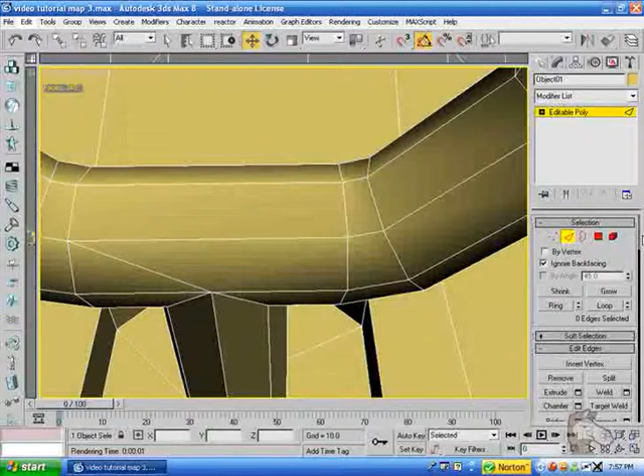Okay. Now I'm just gonna clean this up a little bit right here, so I'm gonna delete or target weld all these unused vertices to the side. Just to make things a little more professional, I'm going to create edges right there and right there. There you go.

Perfectly connected. The only thing left is to apply smoothing groups to that, which of course is really easy. Just gotta make sure you apply the right ones. That has a smoothing group of 1, so we don't want it to blend completely with this other thing it's connected to. So we want to give it a smoothing group of 2. There we go. Looks pretty good.

Except for the fact that this thing up here also had a smoothing group of 2. So we need to fix that real quick, because these are trying to smooth together. So just select everything up here and hit the clear all button. Now everything looks decent.

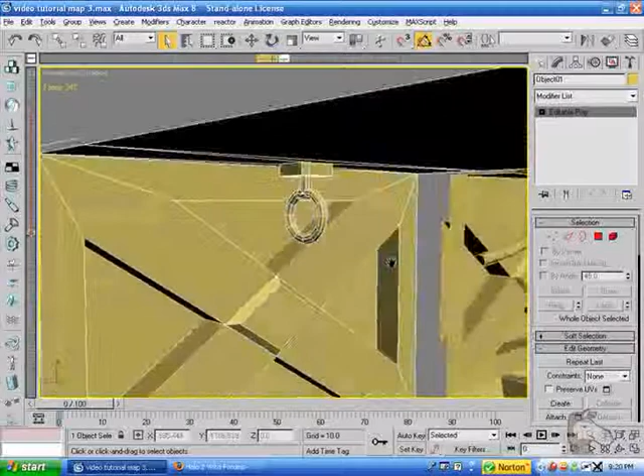Okay, now that that's done, I'm going to go ahead and create that hanging wire tube type thing that goes with loops. There's 2 loops over there, but that's just because there's 2 of these sections connected together. I'm just going to create it in a way where it can be connected end to end without any seams.

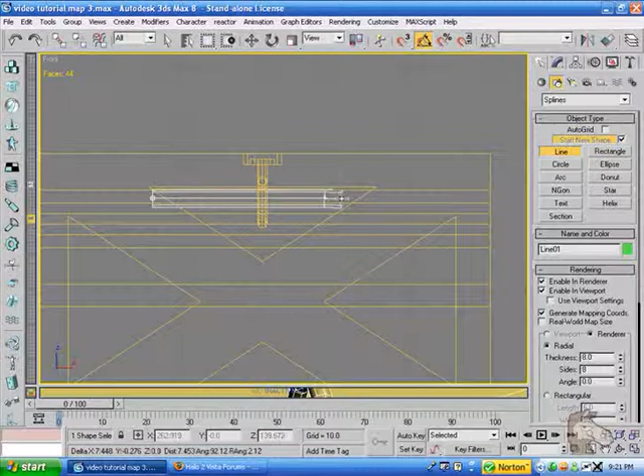Okay, so to create that, I'm going to go into the front viewport. I'm going to create a line to the center of this. Just like that. And to get that, hold on, it's way off in the distance. That's no problem. I'll just move it over here.

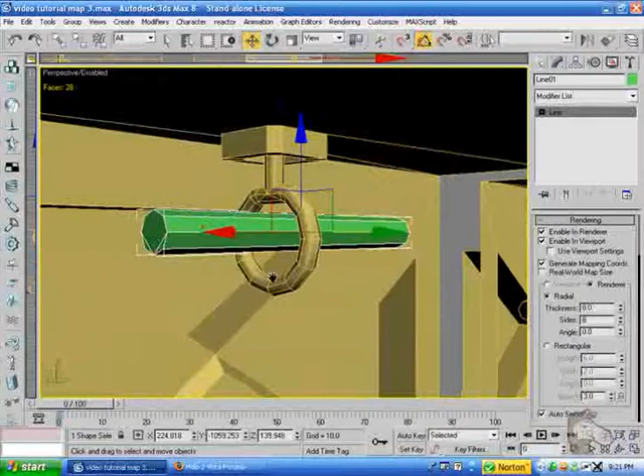Okay, to get it to create the cylinder like that, just enable the renderer and enable in viewport. Give it a thickness of 8 units and 8 sides. Again, you can use less sides if you want to conserve polygons, but I'm just going to use this many because I want everything to look decent.

Okay. So just go ahead and convert that to an editable poly. Delete the ends.

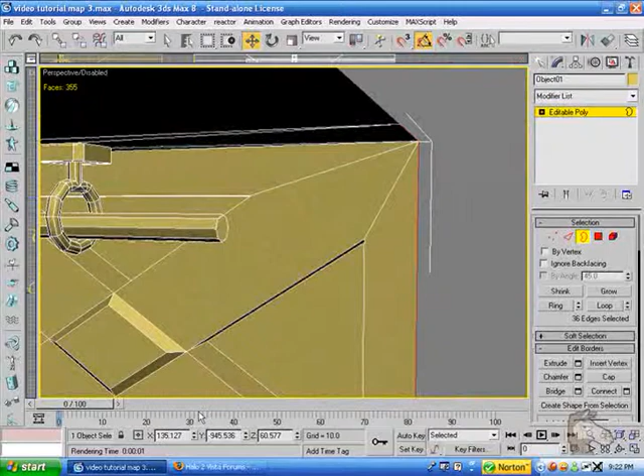Go ahead and select your normal object and attach it to this new cylinder. Find the coordinates of the end of the model and then transfer that to the border end of this, so everything lines up. Do the exact same thing for the other side. Okay, it looks pretty good.

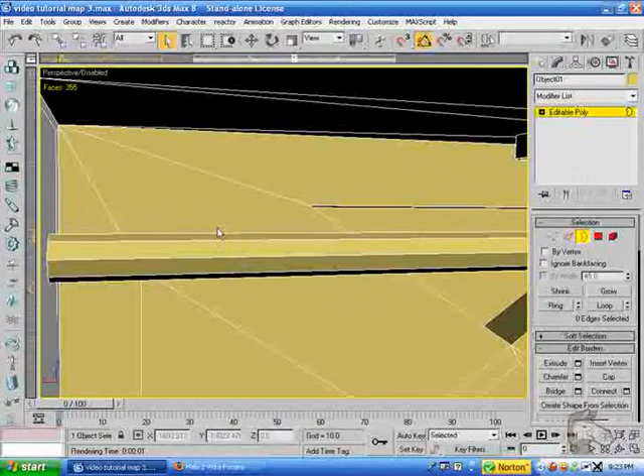Okay, now to do that bent thing, first of all I'm going to connect it in the center once by just selecting all the edges and then hitting connect. Okay, now that that's done, I'm going to move down these borders on the edge to make it more of a curved type of tube thing.

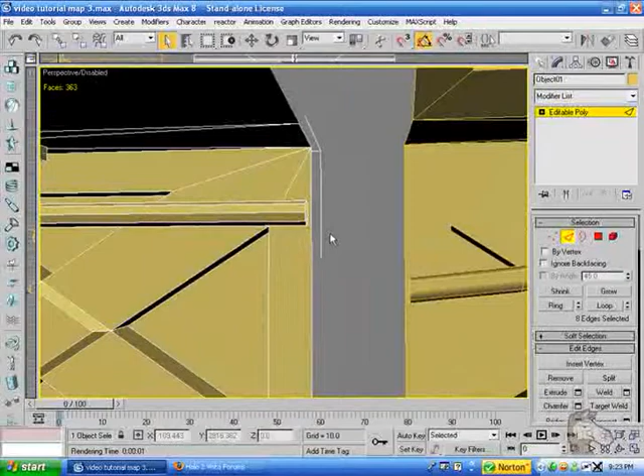So select your 2 borders and then just kind of drag them down like so. I'm just putting them at the same height as I did over here. Once again, these are all decisions you make as you go, but actually that doesn't seem to be the same height at all. I gotta check that real quick. Okay, just a little too high. I'm gonna move it down a bit.

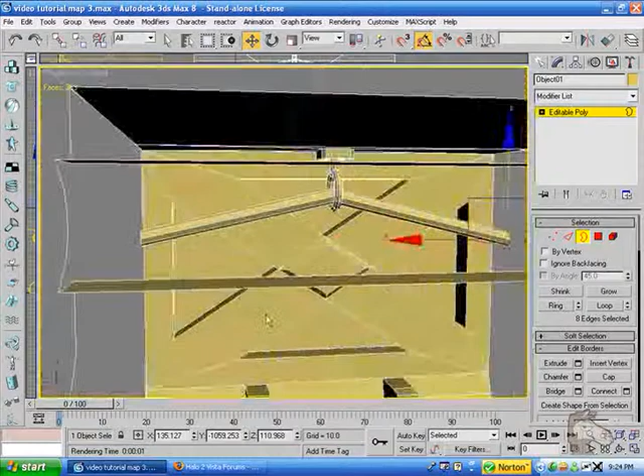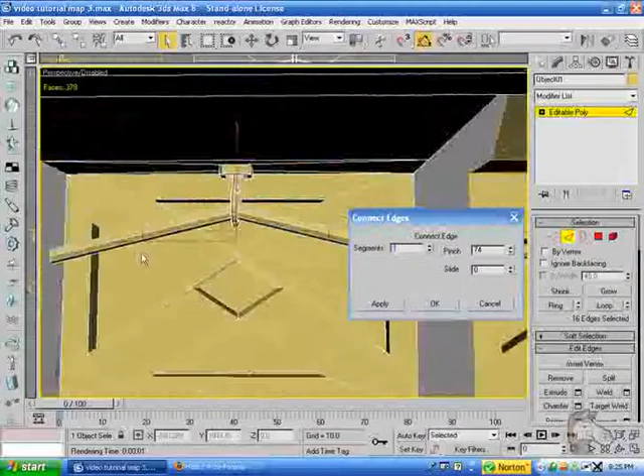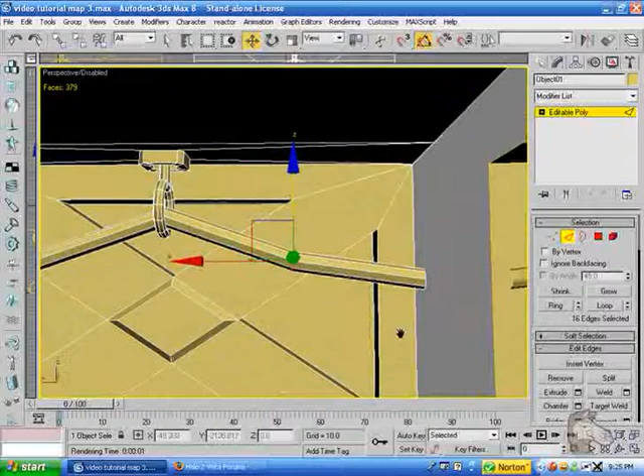And that looks pretty good, so now what I'm going to do is once again connect these edges. This time with 1 segment each. I'm just gonna kind of drag it down a bit, halfway. Just to whatever looks decent. I think that's about right. Then I'm going to go into the chamfer tool and do that by however much is needed.

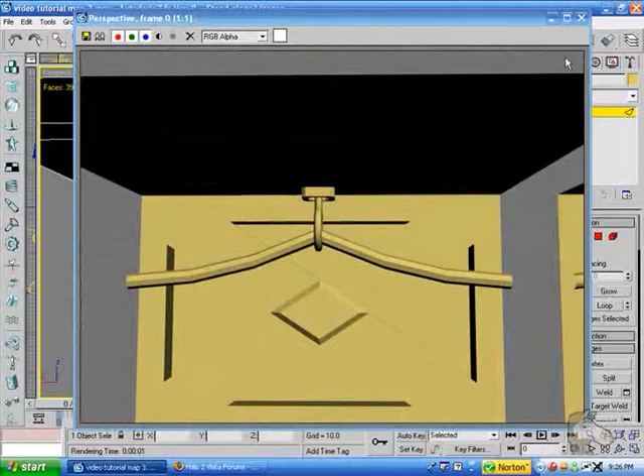It looks a little straightforward, so I'm just gonna drag it down a tiny bit. Should be fine. Alright then. That looks pretty good, so I'm gonna make this top edge a little rounded to make it more realistic, like I did over there. To do that, just select every top edge, making up the sharp corner here.

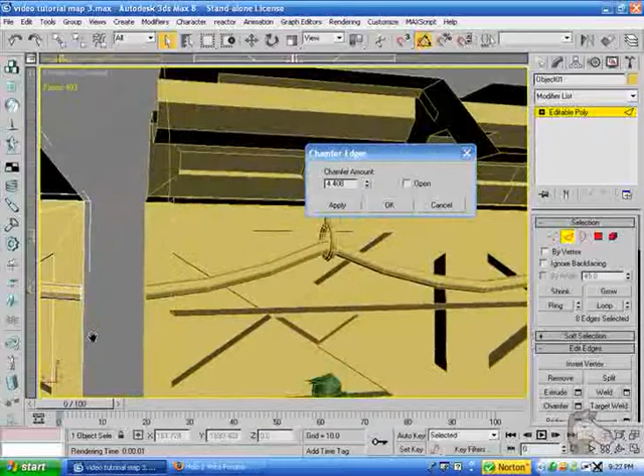And go ahead and chamfer it, but not too much, probably about, well, I'd say 4. I think 4 would be acceptable. Then I'm going to reconnect the center right here to make it even more rounded. Just connect it once and drag it up a bit. And that should look pretty decent. Just tweak that however much you want it to go.

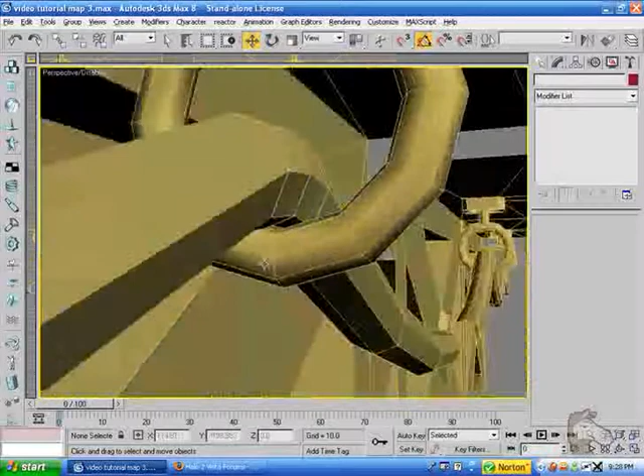Another thing you want to do is make sure that this section isn't intersecting any other polygons, which as you can see it is. It's not actually lined up yet, so I'm going to do that real quick. Just going to line it up with the center right here. And I'm just going to bring it up a little bit so it doesn't intersect anymore. As you can see, there's a small gap in between there, and that's perfectly acceptable.

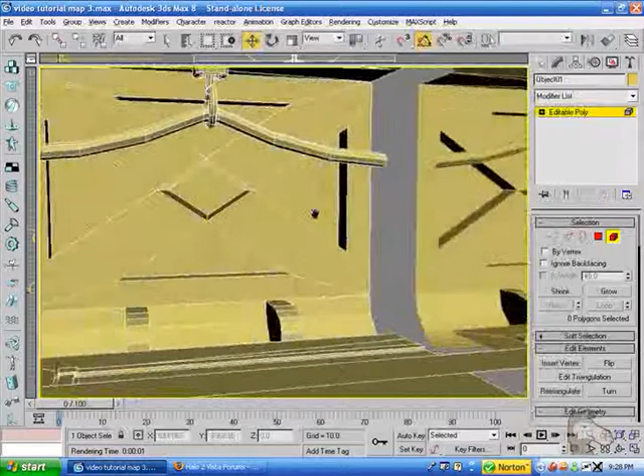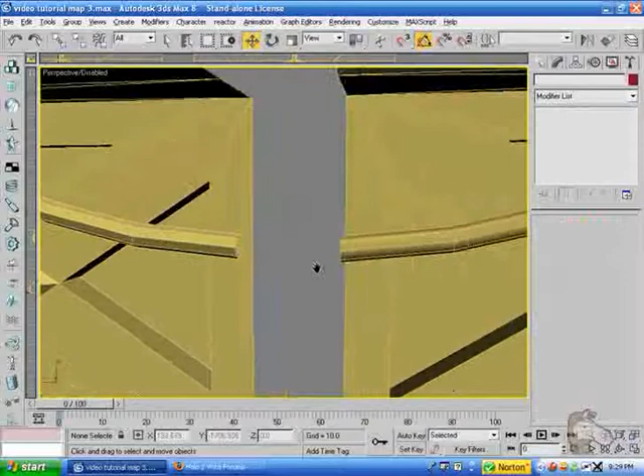I'm not sure for other game engines, but that should be okay for Halo, which is the thing I'm designing this for. It's enough to where it shouldn't cause an error, but not enough for it to be noticeable when you're down here and you're just looking at it. Okay, it looks pretty decent. I'm actually gonna bring it down just a tiny bit more in the end, but not too much to matter. Like I said, I'm just lining up exactly with my earlier model. Not necessary, but I'm kind of a perfectionist.

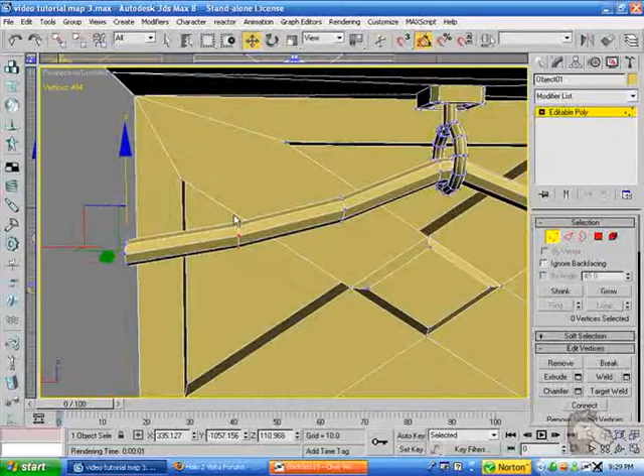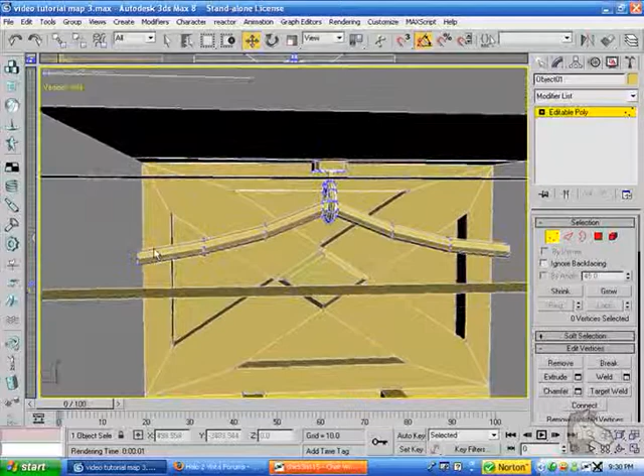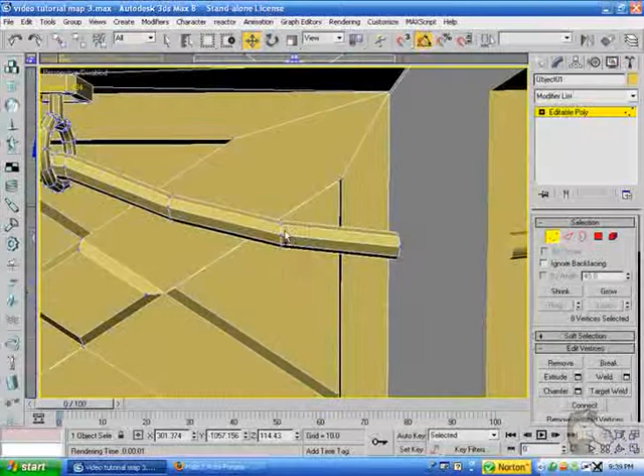I'm just going to tweak that a little bit just to make it look good. Well, that's odd. Okay, something's messing up, but hold on. Okay, so I'm just going to align this a little bit. Actually, I think that looks pretty good. It's just this thing right here looks a little too straight. Same thing over here. I'm just gonna bring that down just a little bit. What the hell? Something's screwing up. That's really weird.